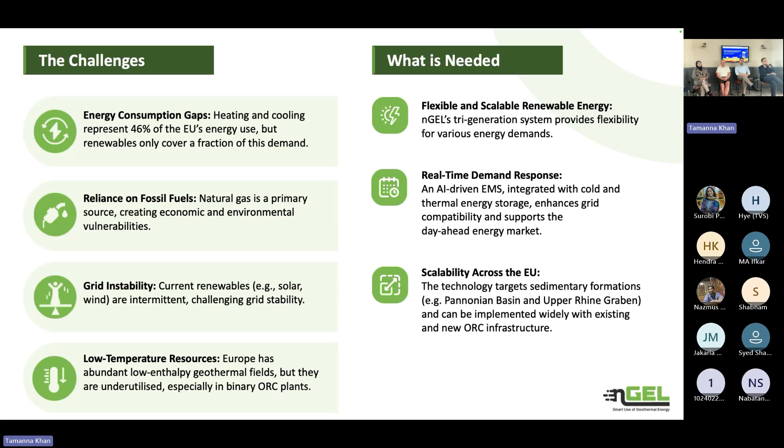At the same time, low temperature resources are underutilized, especially using the ORC plants. So what we need, based on the challenges the EU is facing, is flexible and scalable renewable energy systems, which is what we are trying to achieve through the tri-generational system. At the same time, when you have grid instability, we need real-time demand response, and that's where the AI and our intelligent EMS comes into the picture, trying to address that challenge. And the low temperature resources, as I mentioned, are underutilized. What we are trying to do is achieve scalability across the EU by targeting also the sedimentary formations.

About the key technologies, I'll give a fast overview. We have already almost designed the flexible geothermal ORC with tri-generational capabilities: heating, cooling, and electricity production. Then we want to have demand side management, as I mentioned, to overcome the challenges, and by doing that, increase reliability of the ORC plants against high ambient temperatures, which we may hear about in the innovation part of the last presentation. Bringing these together, we will have an energy management system for the flexible ORC.

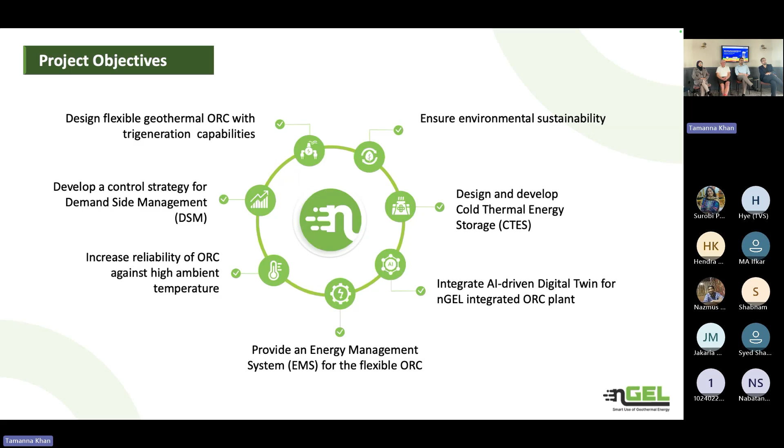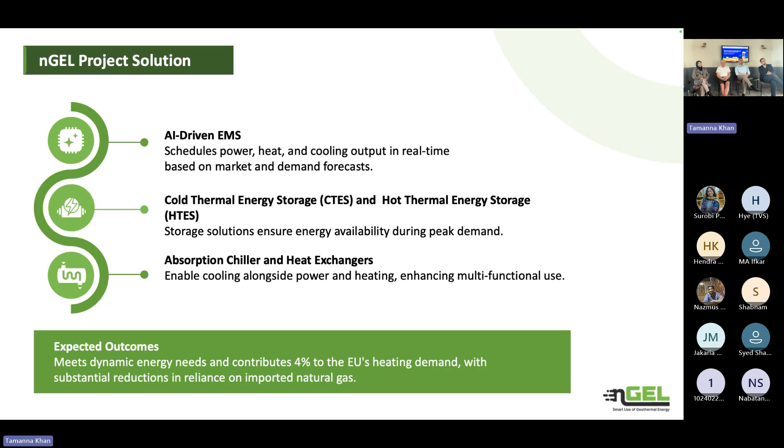Then we will integrate that through a digital twin into the ORC plant, and to bring all this together, an additional design and development for a cold thermal energy storage technology will be done to address the cooling aspect. So there is heating, electricity production, but we are also addressing cold thermal energy storage systems. We want to do that to ensure environmental sustainability. To summarize the solutions: there will be the AI-driven energy management system, the hot and cold thermal energy storages, and also usage of absorption chillers and heat exchangers to support that aspect.

So the key innovations would be the digital twin, bringing all our digital innovations together while having demand side management—that would be the adaptive control strategies. Just as an example, if the demand for electricity is lower at a point in time, then the electricity or the surplus of the brine can be used to produce heat or cold and store it for use when needed. But we will hear about that in the next presentations. By doing that, we will enhance resilience and have smart control integration to achieve all this in an intelligent and controlled environment.

At the same time, we are doing community engagement to understand what the local providers and people's requirements are regarding integration of such technologies.

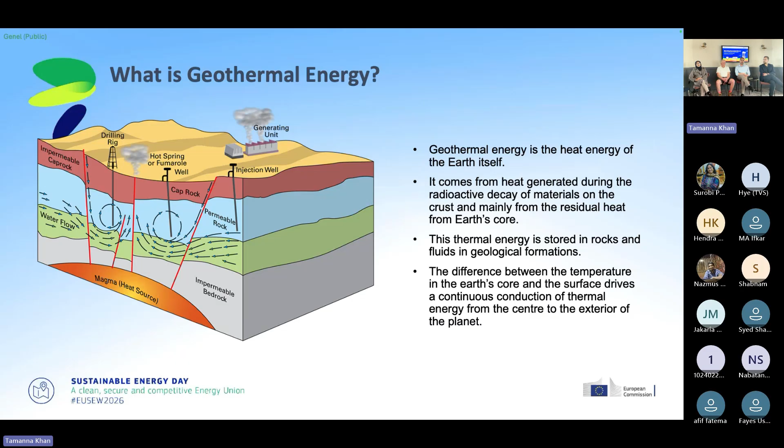The difference between the inner and outer layers of the Earth causes continuous heat conduction from inner to outer parts of the Earth, which helps replenish our heat sources in the geothermal reservoirs.

Let's take a look at the world situation in geothermal energy, then go to a lower scale into Europe, and then talk about the different methods of power generation from geothermal. Right now, in 2025...

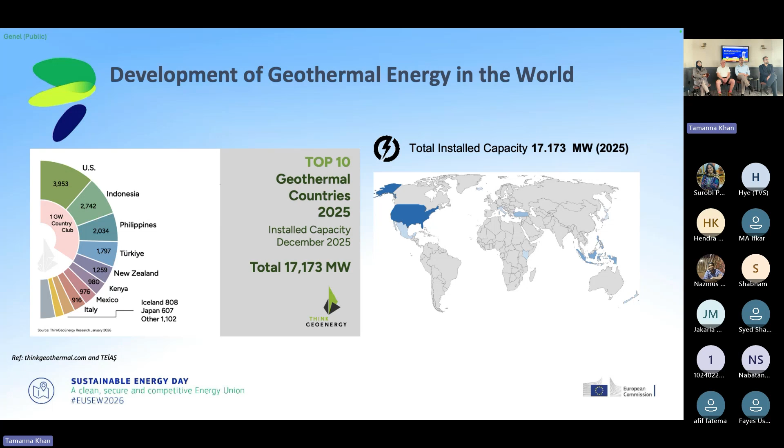We have 17,173 megawatts of installed electric capacity in the world, and about one fifth of it is in Europe in 2024. That's 3,500 megawatts of installed electrical capacity we have in the geothermal sector in Europe.

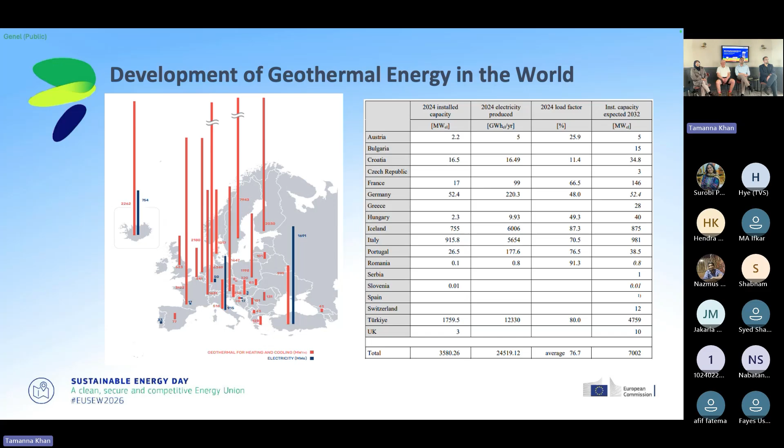However, we have a much higher potential of geothermal energy. We're planning to utilize this, and by about 2032, we're planning to double the amount we have right now in terms of electricity. We're also utilizing a lot of geothermal energy in district heating - the orange lines represent district heating and the blue lines represent power generation throughout Europe.

Let's talk about how geothermal energy is utilized in our day-to-day life. Most of it is used in heating, cooling, or power generation. Additionally, we use this energy in food drying, thermal tourism, and geothermal mining.

In the last couple of years, an emerging technology has appeared called sustainable aviation fuel or green hydrogen, where we utilize green or renewable energy plants to generate materials or fuels that can be used sustainably for vehicles, like jet fuels, which will help create secondary revenues and hopefully more investment in the geothermal sector.

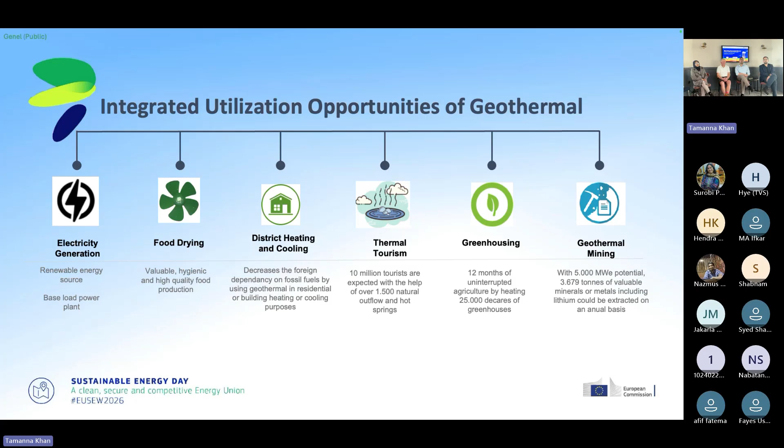Let's talk about geothermal power plants and how they work. As in conventional Rankine cycles, we use a boiler, a pump, a turbine, and a condenser to create a full cycle and generate power. In geothermal energy, the Earth itself acts as the pump and boiler, as we don't need fuel to burn to create heat - we already have the heat.

Depending on the temperatures, enthalpy levels, fluid types if any are present in the reservoir, and the overall soil formation, we can decide which type of power plant to use, or whether to use a power plant at all in geothermal energy.

If we have high temperatures above 150 Celsius degrees, with water or steam dominated reservoirs, we can use dry steam, flash cycle, or combine them together to create combined cycle geothermal power plants.

If we have medium temperature reservoirs, between 90 and 150 Celsius degrees, which we commonly find in Central Europe and parts of Eastern Europe, and the fluid is water dominated, we can use binary organic cycles, and sometimes even flash cycles if we're on the higher end of this range.

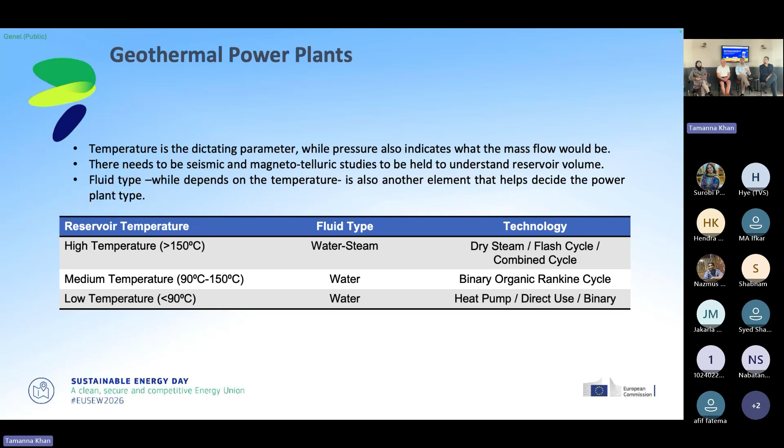Let's talk about dry steam power plants. In these plants, the fluid is mostly liquid in the reservoir, but as it comes up, the pressure drops, and as the pressure drops, the boiling point also lowers.

That causes the complete liquid to flash into steam without any liquid present, and this steam directly goes into the turbine. A small demister equipment is used to remove suspended liquids inside the steam to prevent any damage to turbine blades. After the turbine, this low enthalpy steam is then condensed into cooled water and re-injected back into the reservoir.

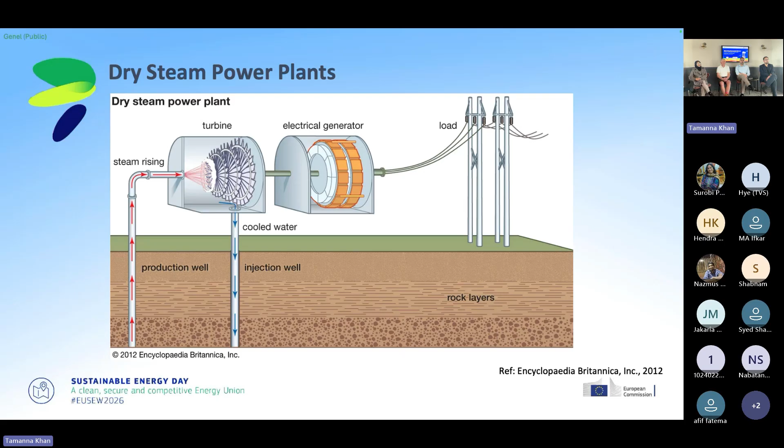These concepts do not change in any geothermal power plant operation. The production well and injection well act the same way. The media might differ in terms of fluid, steam, or gas, but the operation method is almost the same, and you have to re-inject when it's in liquid form to prevent excess power consumption, using a controllable injection.

Then comes flash steam power plants. This is utilized when you have enough enthalpy for steam to be generated, but also some liquid existing in the mixture. That means you have to separate the steam from the liquid, but to do it efficiently, we utilize a control valve before the separator tank, or flash tank, as you can see in the diagram. Before the flash tank, we set the pressure to a lower level than the fluid's own pressure, so we create even more steam to utilize in our turbines.

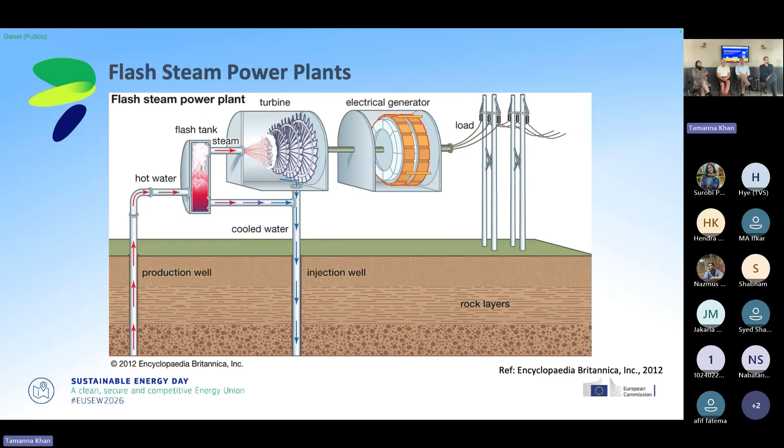Then we mix this, after we condense this steam, with the liquid part of the geothermal brine. The fluid we call geothermal is mostly named brine in terminology. So this brine is mixed with the condensed steam, which is liquid again, and then re-injected back into the reservoir.

And the last one, where we have mostly low enthalpy reservoir or low enthalpy fluid, or low amounts of flow from the reservoir, we utilize binary cycles. Binary cycles, by definition, mean two different cycles. We have the brine cycle that comes from the reservoir, which is not turning into steam, maybe even small traceable amounts, but they do not affect the overall design.

They are usually separated and removed from the system so they don't cause inefficiencies in the heat exchanger, and then condensed and again mixed with the brine itself for re-injection. That's our primary line. Then we have the secondary line, where we utilize an organic Rankine fluid such as pentane, butane, or isobutane, a similar fluid with a lower boiling point and lower condensing point, which can be efficiently used for power generation since it's in the range of our temperature.

So we have some complex systems such as combined cycle geothermal power plants. These combined cycles can differ in design, but this is one of the designs we are using right now in Kızıldere 2 geothermal power plant.

In this one, we are using consecutive flashing. So we have high pressure, intermediate pressure, and low pressure separators. After each separation process, the liquid still has a lot of enthalpy, a lot of steam potential, so we are continuously decreasing the flashing set pressure, starting from 7 bars, going down as low as 1.1 to 1.15 bars.

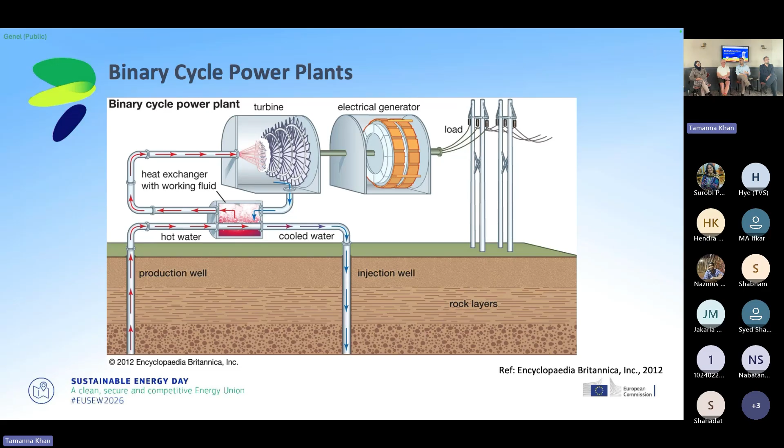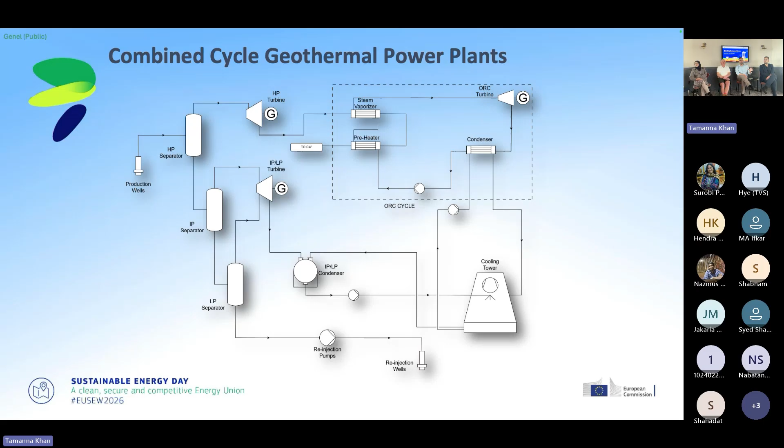Geothermal is the only base load power where the main resource is renewable. That creates a problem for ORC power plant operators, because most of Europe does not utilize a flash cycle—only Iceland, Italy, and some parts of Western and Southern Europe can utilize flash cycles or dry steam cycles. Most of Europe utilizes an ORC cycle, and inefficiency in the ORC cycle causes investors to be unsure or reluctant about their investment. So the main focus, as nGEL, is to increase the overall efficiency of the ORC power plants.

In day-to-day operation of a geothermal power plant, the prices of electricity can differ from day to day or throughout the day itself. It can fluctuate, causing the investor to be unsure and unable to forecast when the return of investment could happen. But if a geothermal power plant had the flexible ability to change its main course of revenue at the time—such as heating, cooling, or extra power generation with the help of power storage or thermal energy storage—the story might be a lot different than it is today.

We considered some base cases, and throughout the project we will work on them in more detail. Our main idea is that when power prices are lower on the electricity market, we can divert some of our fluid for either heating, if it's the colder months, or heating or cooling if it's the hotter seasons, or storing the energy in a thermal energy storage tank to be utilized later with the help of a secondary ORC or smaller additional power.

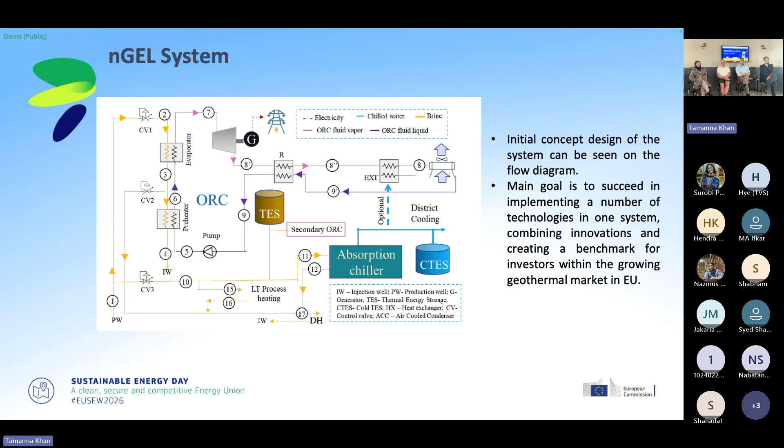Let's see it in more detail now. This is the final version which we'll be working on in the nGEL project. As you can see, we are utilizing a thermal energy storage tank in the middle. We are utilizing an absorption chiller for cooling purposes, using the main heat source as what we could call waste energy at that time, since we will not be getting any revenue from it. We also have the thermal energy storage, which we can utilize if it's not needed at that time but can be used later on.

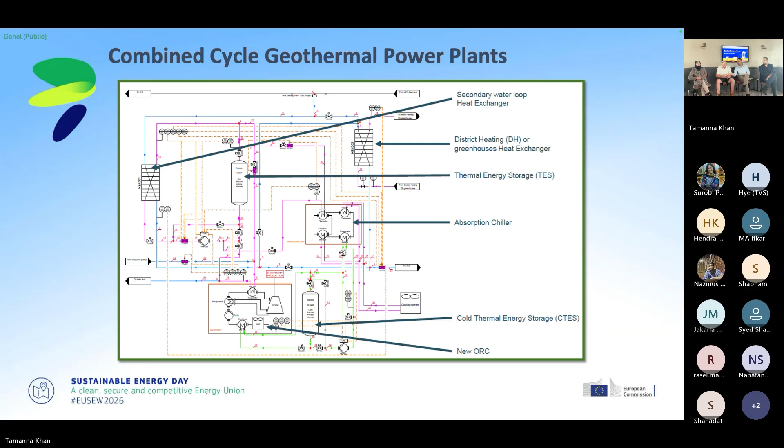As Tuğrul mentioned in his earlier slide, all of this geothermal energy and resource is buried below us. It's like somebody, when they were designing the Earth, decided, let's put in underfloor heating. And we're suddenly in the 21st century thinking, this is a good idea, isn't it? Let's try and use it.

What I'm going to talk to you about today is how we access these geothermal reservoirs or high temperature rocks, and how we utilize that heat at the surface, which ties in with Tuğrul's presentation.

I want to be honest, this is going to be an overview, and we haven't really changed the way we've drilled things for over 100 years. We're still basically imparting mechanical energy into the formations to break them up and then move them out of the hole. So all of you who have put up picture frames on your walls at home and need to drill a screw in, that's the basic technology we're using, just in a slightly larger way.

The key thing we always talk about: if we're going to spend money on drilling, we want something at the end of all the work we do. We need a wellbore that is usable. So quite often we'll talk about, oh, let's drill really quickly. But if you spend half the amount of time to drill a hole you can't use, you've wasted all that time. So we're looking at having a usable wellbore, because that's our access to the resource.

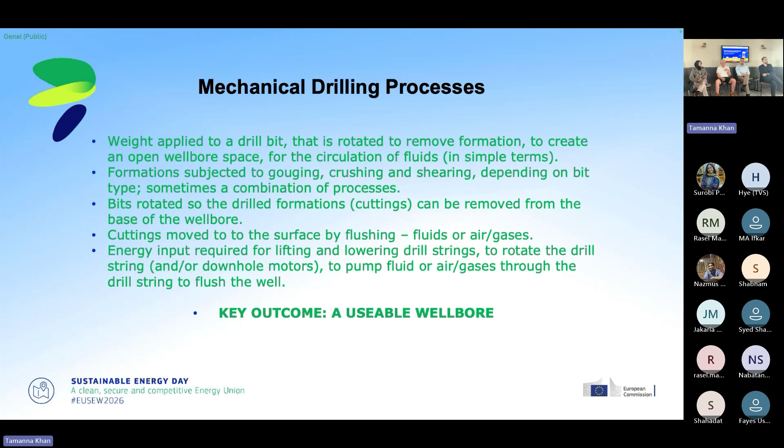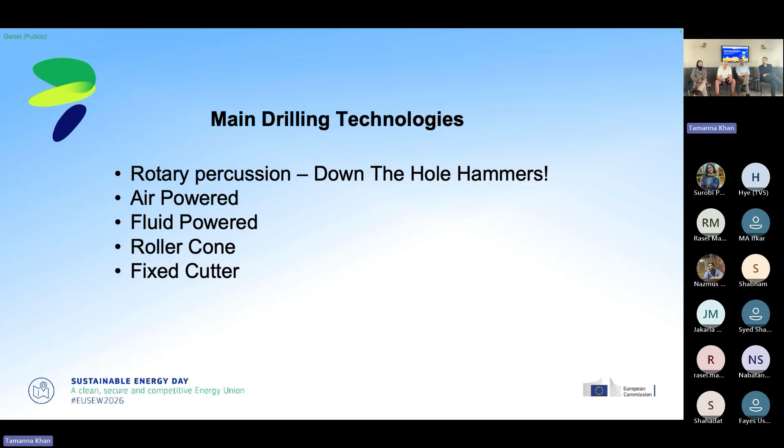The main drilling technologies used today are still in use today. There are a few exotic versions, and I'll talk to you about those in a minute. We have rotary percussion, which is basically the same as your little handheld hammer drill at home, generally powered by air. There are fluid-powered hammers, and these are increasing in their technical capabilities. We have roller cones, you'll see these in a minute, and then we have fixed cutter bits. So those are the basic technologies in use today to make a hole in the ground.

Down the hole hammers are probably the biggest market for drilling into rocks. They're very efficient, but very expensive to operate because compressing air to the pressures and volumes we need is quite expensive. So we're looking at alternative methodologies now to have the same level of impact to break rock, but in a less energy intensive way.

When we look at the overall cost of drilling, we try to analyze specific mechanical energy — how much energy we have to use to break the rock and then move it out of the hole. It's quite a technical subject, probably not for today, but for those of you interested, reach out to us because we're very happy to share this information and a lot of the new technology that's coming along.

I just wanted to say as well, I love the fact the European Union has started to call this sustainable energy. For too long now we called it renewable, and lots of people think we don't need to do anything, it's renewable energy. What we need is sustainable energy, whether it be renewable or from other sources. So sustainable is very much the focus of what we're trying to do here — get slightly more out than we put in.

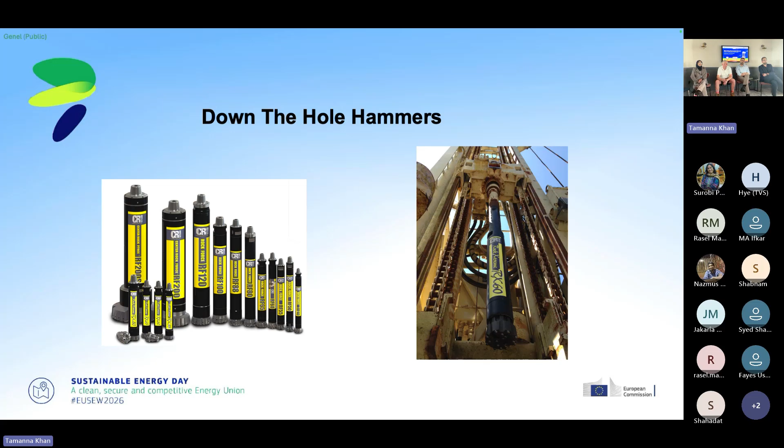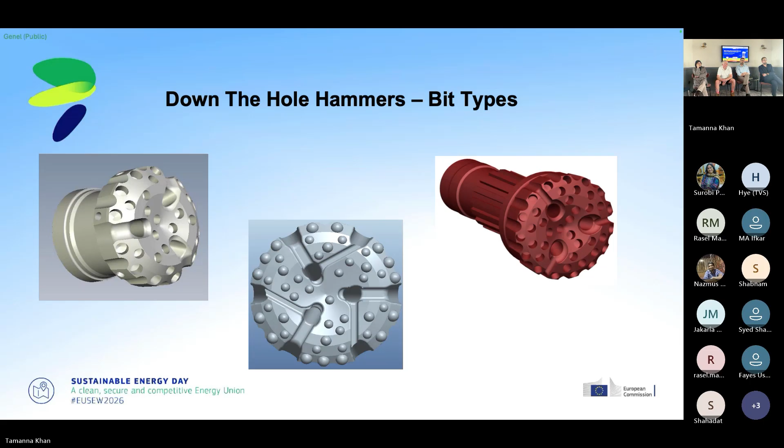So there are risks associated with using these technologies. But the one nice thing is, because it's compressed air, we never run out of feedstock. If we run out of air, then everyone on site is dead, so it doesn't really matter.

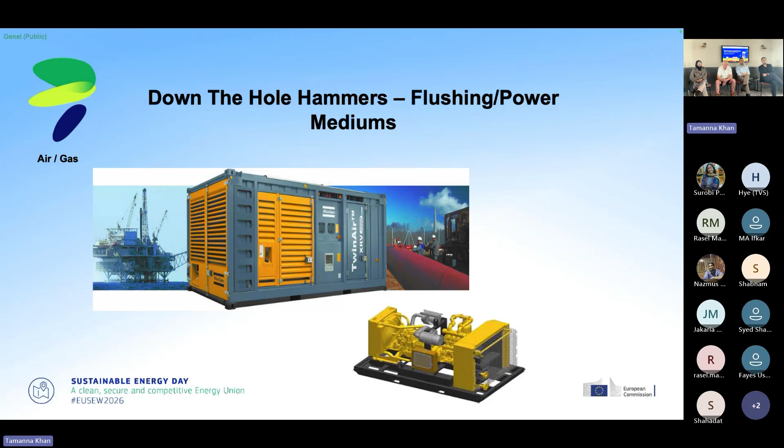It works the same in basic terms as the air hammer, but uses water. The advantage is the hole velocity of your flushing fluid is much lower than it is with air, so you get less wellbore damage. Under high heads of water, if you drill into an aquifer with quite high water heads, we can keep going. Whereas with air, we have to make sure we have enough air pressure to aerate the water to lift it out the hole, so that becomes a limitation.

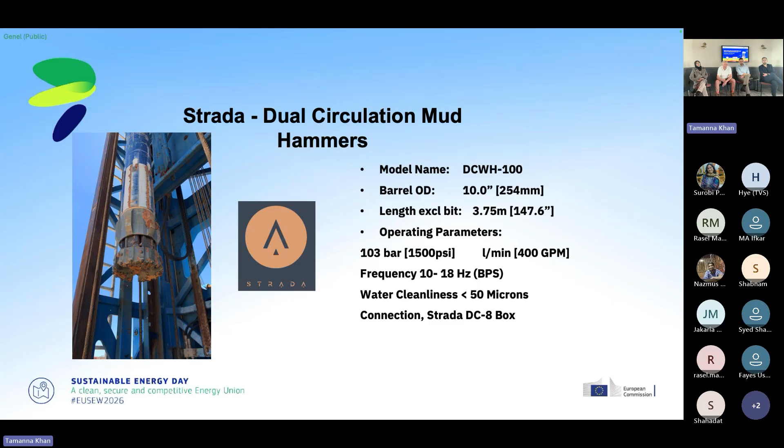ROP is what we tend to look at, so the rate of penetration is how we work out the overall cost, because if you're drilling quicker, then you're getting your return on investment that much quicker. Generally, if we stay in the higher strength rocks, which a lot of geothermal is looking at now, with conventional drilling we're getting about 5 meters an hour. With hammer drilling, we're getting around 15 to 20 meters an hour. So there's a marked increase in using down the hole hammers.

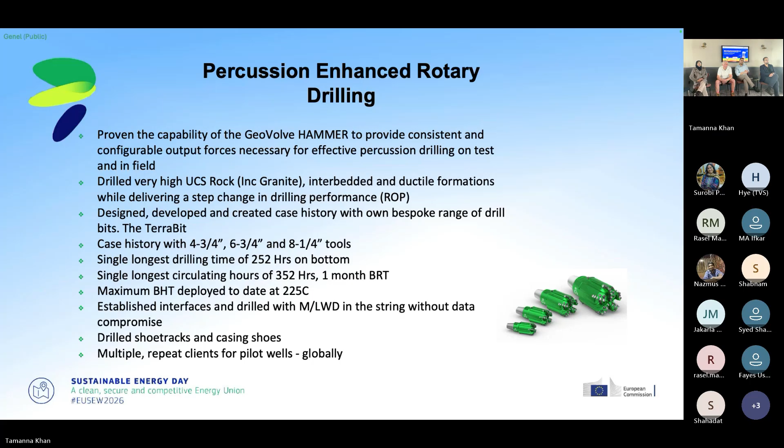They're good because there's a lot of history behind them. So to completely dismiss rotary drilling is rather foolish, because probably 95% of all deep holes that have been drilled used this methodology. So it's proven. It may be slow, it may be outdated, but it's proven.

So we don't want to throw these on the scrap heap just yet, because companies like Baker Hughes are still developing different types of inserts and all sorts of gauge angles, etc. So I think it'll be another 10, 15 years before we see the complete demise of the roller cone.

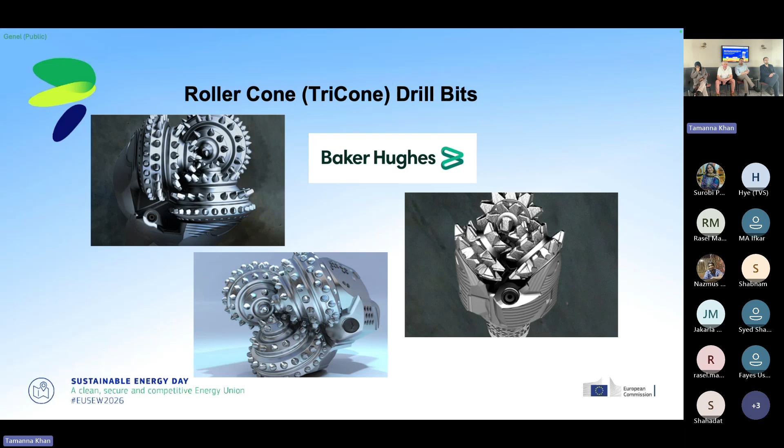When it was first invented, it only had 2 cones, but then it didn't really ring true like dicone. So Howard put a third one on and called it tricone. Sounds a bit better.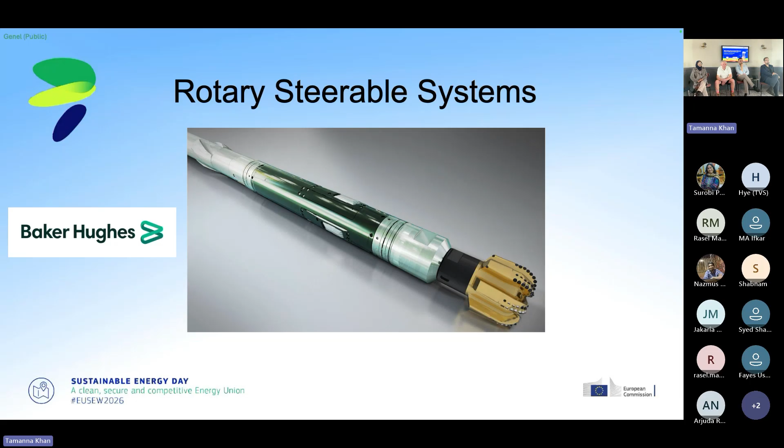I just want to quickly touch on where the more exotic research is going at the moment. Non-mechanical technologies are where we don't engage with the actual rock itself, but we're using energy to break the rock, and in some cases actually vaporize it. So we put high temperatures in there and vaporize the rock.

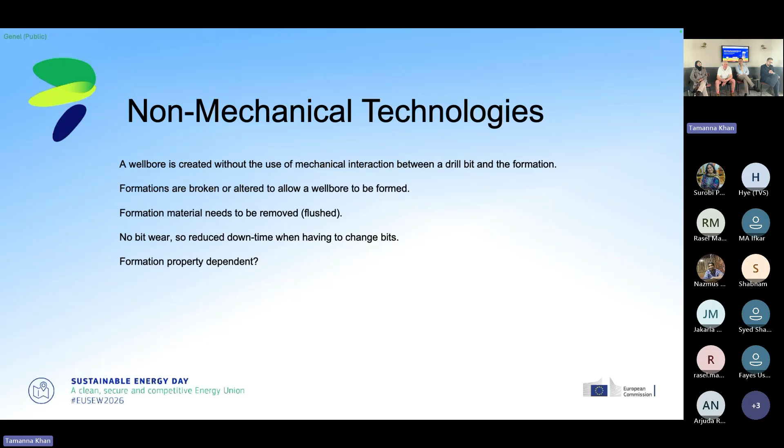Those are the main ones that people are looking at the moment, and I'll quickly touch on them. Electropulse boring, I put up there. You can go and look at these yourselves because they are very complex, to say the least. Plasma technology - there's a company called GA Drilling, which stands for Geothermal Anywhere. They've been developing the plasma technology for a few years now. Again, this is where they actually vaporize the rock. This is a very interesting one.

This is Quaise Energy. They're using millimeter waves, again, to break and vaporize and spallate the rock. They claim they're going to be drilling 20 kilometers in 100 days. So that's going to put us into the super high temperatures. Tuğrul mentioned sort of 150, we're talking 550 to 750 degrees at these sorts of depths.

And then laser drilling. I'll put a few more slides up here, because I was involved in a project that's just finished looking at how we can utilize lasers to drill to great depths. We've got a long way to go, but it is promising.

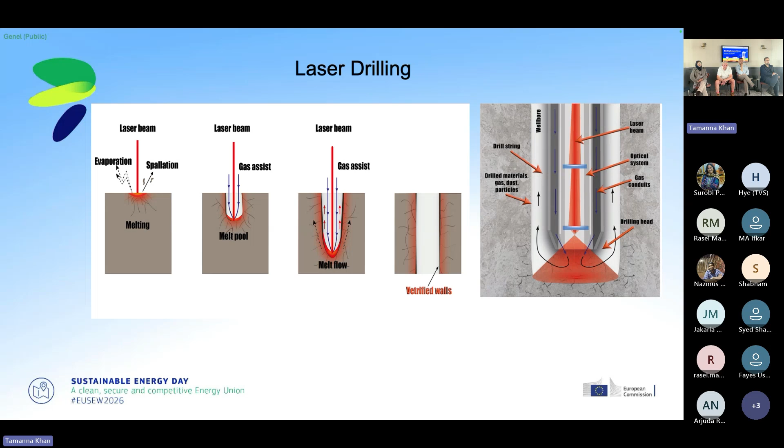And that's it. If we didn't fall asleep, over to our good friend Mahfuza.

So I'll talk briefly about tools and innovation for geothermal energy harvest. We all know geothermal energy is the most reliable, sustainable, and renewable source of energy. As you can see from the plot, the availability factor for geothermal energy is the highest among all other renewable energy, and as well compared to fossil fuel energy.

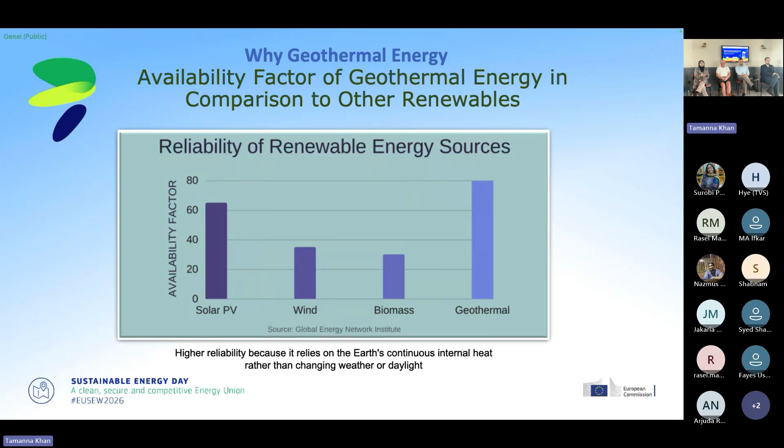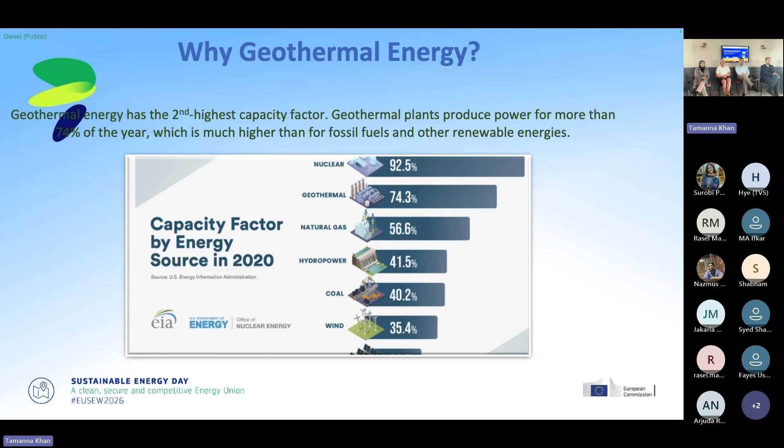And the capacity factor of geothermal energy, as you can see from the plot, is the second highest among all of the renewable energy. So it has lots of positive and favorable things for power development, and that's why it's growing. But the problem with the geothermal power plant is its low efficiency, low plant efficiency, compared to other renewable energy and fossil fuel energy.

One of the reasons is thermodynamic limits. So far, we've been able to access reservoir temperatures available for the power plant of about 150 to 400 degrees Celsius. Whereas fossil fuel comparatively gives 500 to 1,000 degrees, and CSP, the concentrated solar plant, is also quite high, similar to fossil fuel. So this is one of the reasons that the geothermal power plant can't compete with respect to efficiency with other renewable energy and fossil fuel.

So the low plant efficiency, there are many reasons. I've just listed a few here. One of the reasons is the reinjection temperature.

As you know, geothermal brine has various chemical compositions, such as sodium, potassium, and silica. Depending on the geographical conditions, some production well brines contain silica, some contain calcite. These precipitate in the plant, mainly the silica, causing silica scaling of the plant equipment.

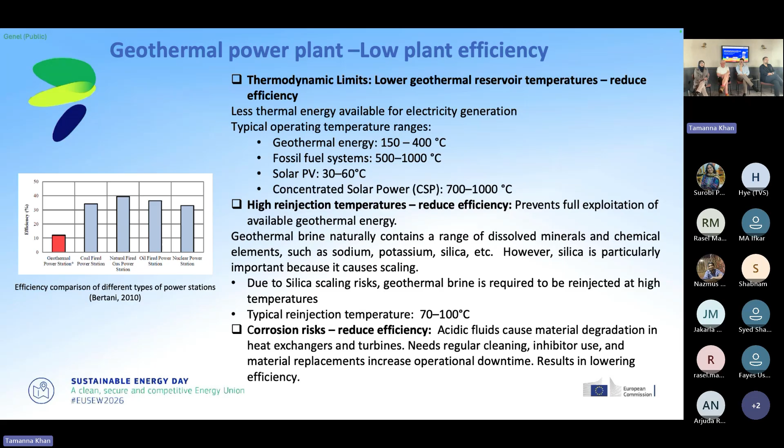There are obviously many more issues associated with drilling and others.

So with Technovative Solutions, we're developing a decision support system tool to evaluate the sustainability of different geothermal project configurations and innovative technologies, and we also simulate and optimize plant performance.

So this is basically analyzing the sustainability, that's why we're calling it a sustainability tool as well.

We, Technovative Solutions, work on different EU Horizon 2020 and Horizon Europe projects, as listed below. All the Horizon 2020 projects are completed. Currently we're working on Horizon Europe projects, nGEL and Serene. I think Compass is recently completed.

These projects address various issues such as scaling, corrosion, erosion, heat transfer efficiency of heat exchangers, and improving drilling technologies to reduce cost.

As Tuğrul mentioned about the ACC-based plant efficiency drop during summertime, that means ACC-based plants are not generating the same power around the year—there's a drop of power during summer. So there's scope for development to increase reliability.

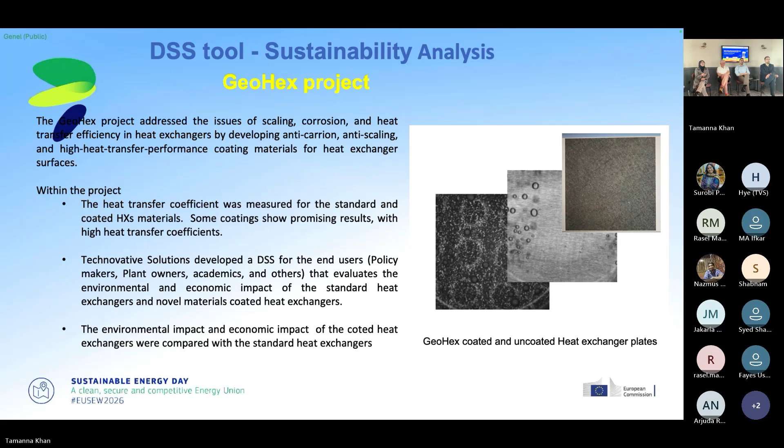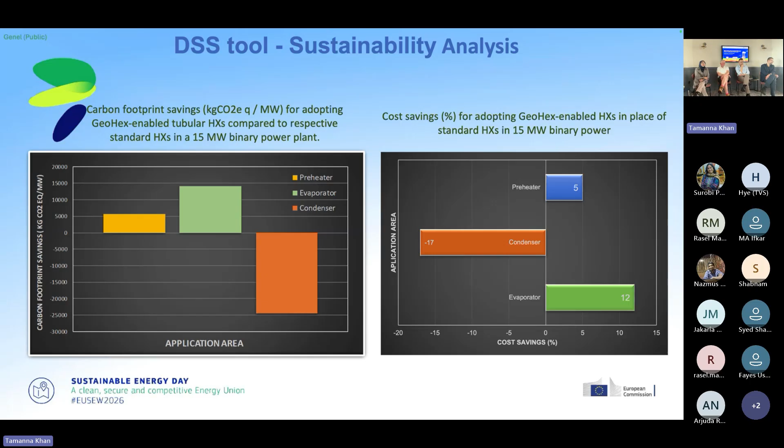So there are some good results we obtained for the GeoHex-enabled heat exchangers.

Then the GeoSmart project here. In the GeoSmart project, we mainly work on flexibility, introducing thermal energy storage, which will also increase plant efficiency through exploitation of more thermal energy available for the plant, by integrating a scaling reduction system.

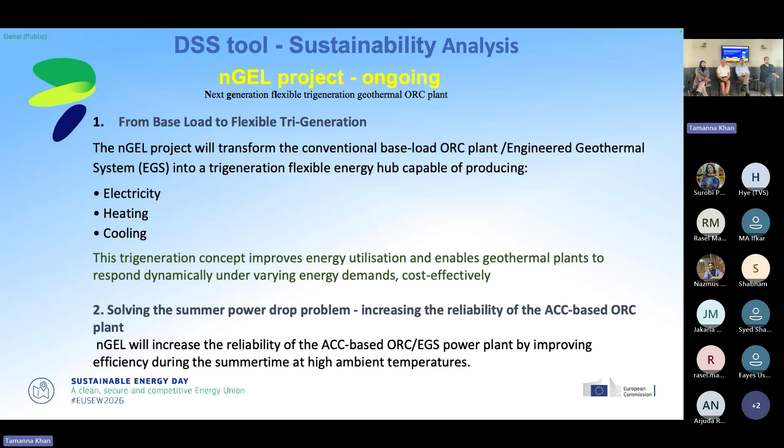In this project, we are developing a digital twin with decision support system functionalities which will analyze the sustainability of the nGEL technologies and everything. There are others as well, which my previous speakers already mentioned. So let me just go straight to the digital twin.

We are developing a digital twin for the tri-generation plant with the decision support system, as I mentioned. The digital twin will replicate the behavior of the real physical plant within the project, including nGEL components integrated to the ORC plant performance, ACC performance, absorption, evaporation, thermal energy storage dynamics, and ambient temperature impact.

During the project, we are mainly aiming at the nGEL concept, because we need to demonstrate and validate the digital twin. But beyond the project, this digital twin will be usable by any stakeholders such as plant owners or academics, mainly for the ORC, the organic Rankine cycle plant, or any EGS plant, which is basically ORC.